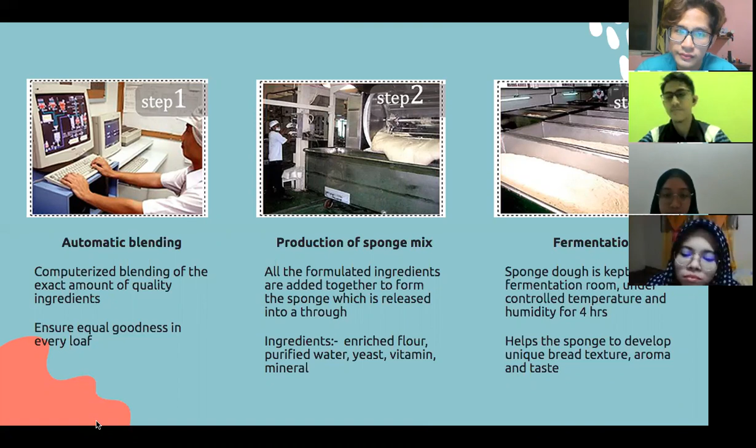The next step is the fermentation process. The sponge dough is kept in the fermentation room under controlled temperature and humidity for about 4 hours. This fermentation process helps the sponge develop its unique bread texture, aroma, and taste.

The next step is production of the dough mix, where the sponge is mixed again to form the dough. Then comes the dividing process, where the dough is divided into the required weight for each loaf of bread.

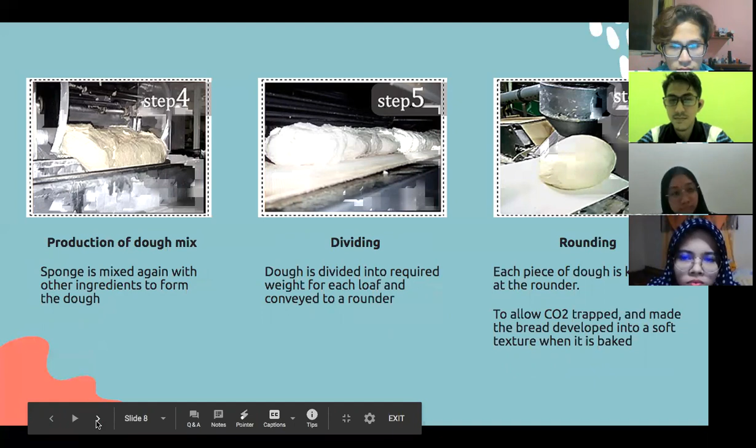The next step is rounding, where each piece of dough is kneaded at the rounder. This rounding process makes sure carbon dioxide is trapped into the bread, which allows it to develop a soft texture when baked later.

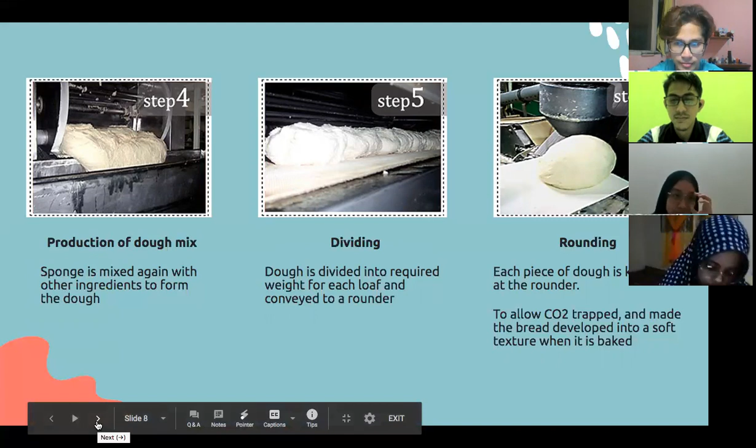The next step is check weighing. Through the check weigher, the dough pieces that are over or under the required weight are automatically rejected.

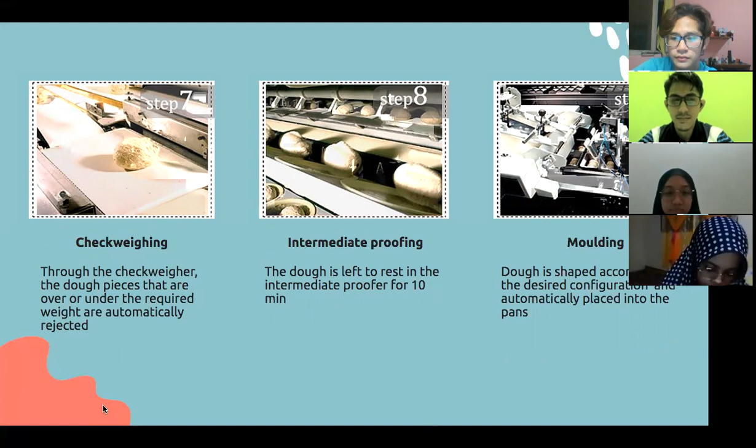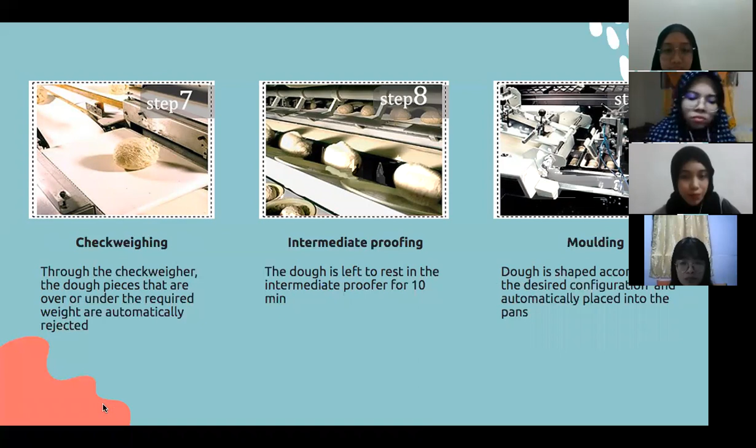The next process is intermediate proofing, where the dough is left to rest in the intermediate proofer for about 10 minutes. Next is the molding process, where the dough is shaped according to the desired configuration.

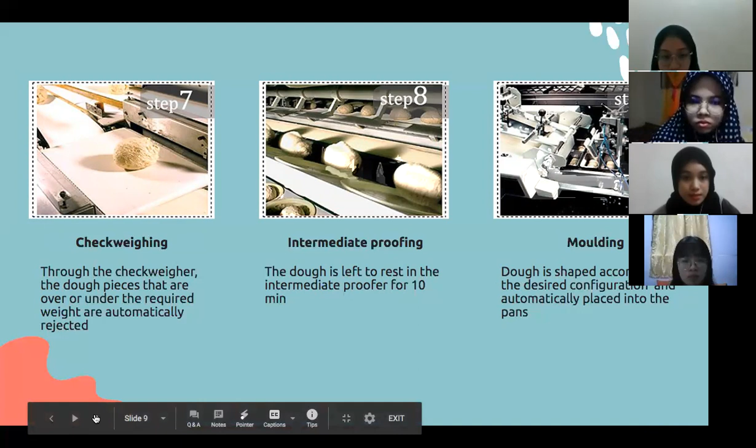The next process is automatic lidding, where the pans containing the loaf of bread are lidded automatically to give the bread its uniform rectangular shape. Next is the final proofing process, where the yeast allows the bread to rise further to the desired height.

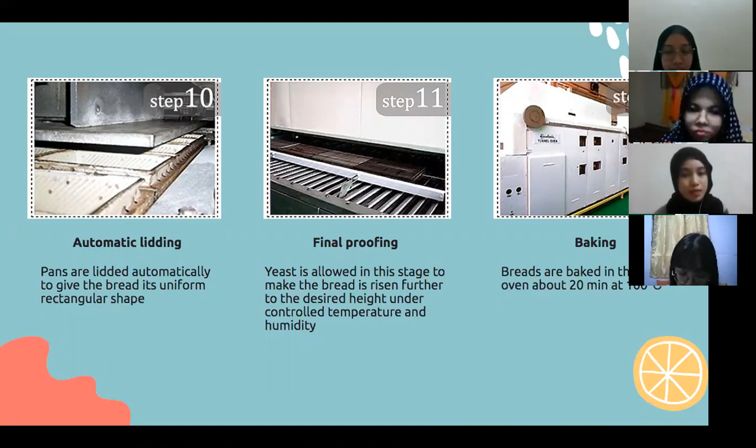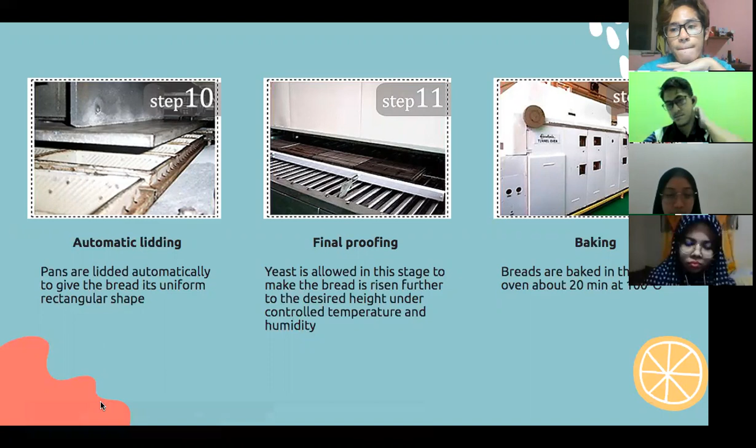Next is the baking of the bread. The bread is baked in the tunnel oven for about 20 minutes at 180 degrees Celsius.

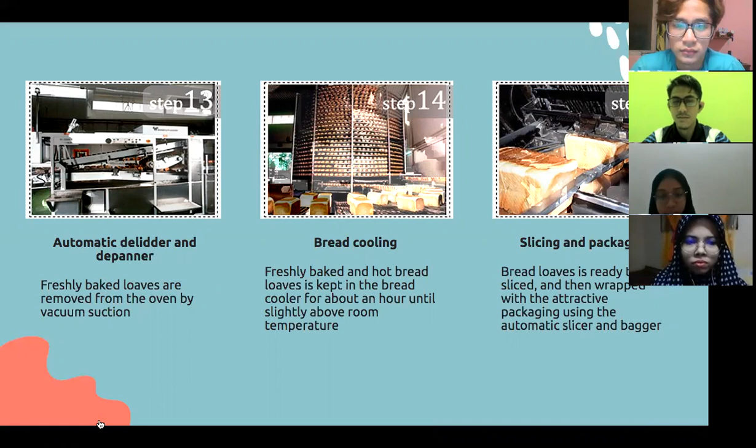The next process: the freshly baked bread is removed from the oven by vacuum suction using the automatic depanner. Then comes bread cooling, where the fresh baked hot bread loaf is kept in the bread cooler for about an hour until it's slightly above room temperature.

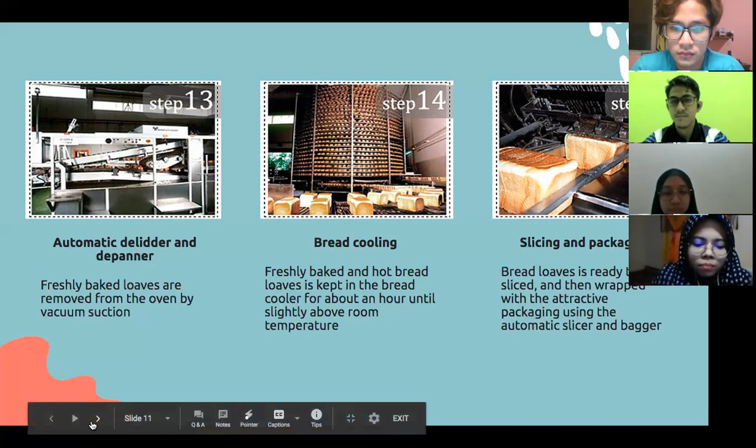Lastly, the process of slicing and packaging. The bread loaf is ready to be sliced and then put into attractive packaging using the automatic slicer and bagger. That's all the process for the production of white bread.

I will continue with the types of waste produced by the bread industry, especially white bread products. The first waste produced is raw ingredients. Usually, raw ingredients are thrown out because of spoilage, such as flour, sugar, and yeast.

Next is dough, which usually gets stuck in the bread machines, such as the blending, mixing, and rounding machines. Next is bread crust, which is usually found at the oven due to the baking process.

Next is rejected bread, which is found at the quality control process due to burnt bread.

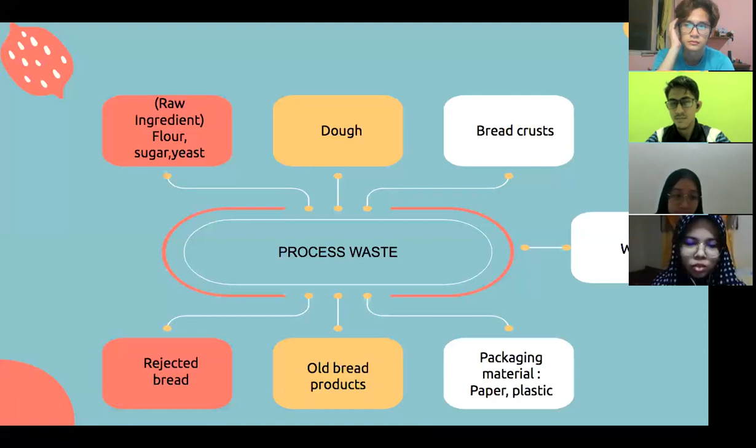Next, I will explain the waste management techniques suitable for each waste byproduct. For all the solid waste just explained, we decided to dispose of it using a sanitary landfill. It is a designed structure built into or on top of the ground in which trash is isolated from the surrounding environment.

The reason we chose sanitary landfill is because all the solid waste in making white bread is non-hazardous. Therefore, it is suitable to use landfill as it will not cause damage to the land. Besides, sanitary landfill will not cause air pollution as it is designed, sited, operated, regulated, and monitored in a safe and environmentally responsible manner. Moreover, using sanitary landfill gives an economic benefit for the industry as it is low in cost.

This is the overview for the wastewater treatment in white bread making process. It consists of preliminary, primary, secondary and tertiary treatment. First of all, I will explain the preliminary treatment part.

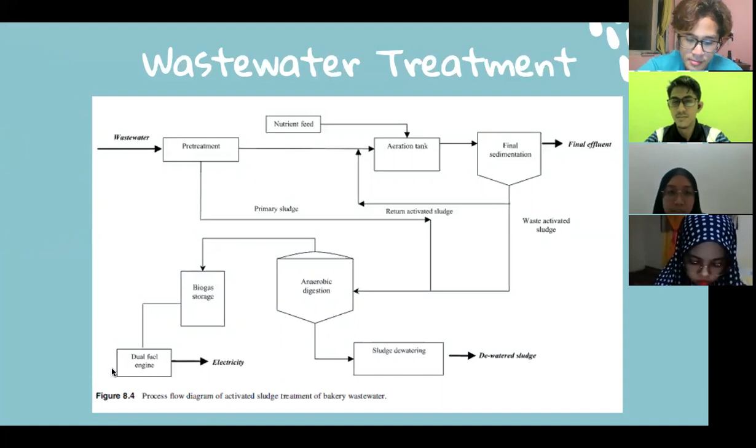The first step is screening, which is basically to remove the coarse particles in the influent. The second step is separating the fat, oil and grease. As the wastewater in bread making process normally contains a high amount of these organic compounds, this step generally reduces the difficulty in the subsequent biological treatment.

The third step is flow equalization and neutralization, which is to meet the peak discharge demand. A decrease in pH and bad odor are common problems during operation. The fourth step is acidification, which helps break down any remaining fat, oil and grease by adding sulfuric acid to keep the pH at an optimal level.

The fifth step is coagulation and flocculation. Coagulation is used to destabilize the suspended solids, while flocculation is used to grow the destabilized suspended solids so that they become heavier and large enough to settle down. This is done by adding chemicals like alum and ferric chloride.

The next step is sedimentation. The working mechanism is based on the density difference between suspended solids and water, allowing suspended solids with larger particle size to settle more easily.

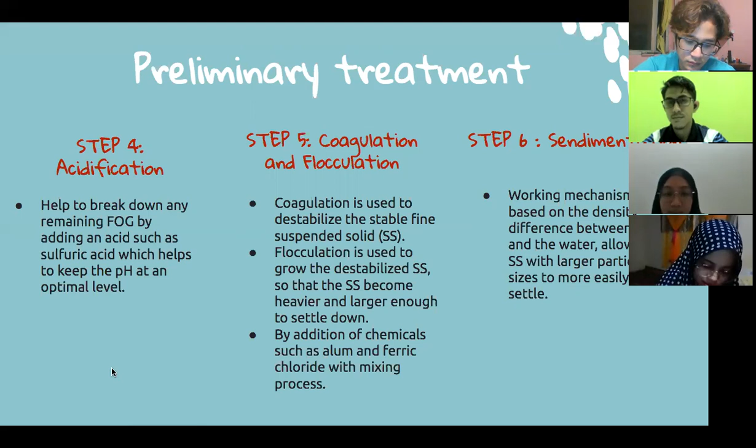The next step, which is the last step for preliminary treatment, is dissolved air flotation. This works by pumping compressed air bubbles, and because of the sudden reduction in pressure, air bubbles form and rise to the surface of the tank. The suspended solids, fat, oil and grease adhere to the fine air bubbles and are carried upward.

Generally, preliminary treatment removes suspended solids, fat, oil and grease, controls pH, and preconditions the wastewater to a level optimum for primary or biological treatment.

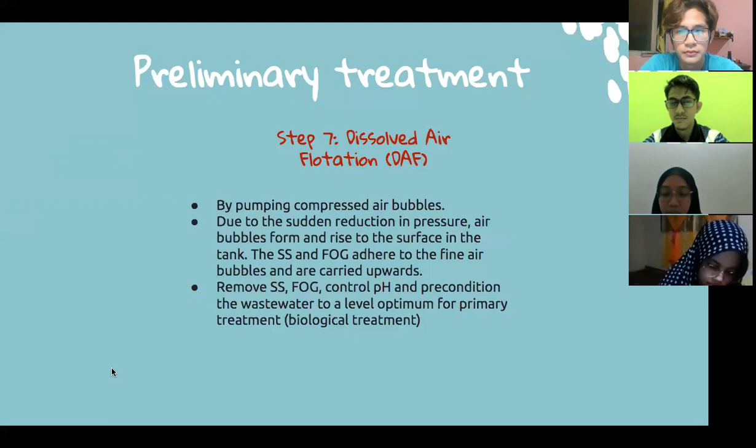Next, I will explain the primary and secondary treatment of wastewater. First, the primary treatment includes fat and grease removal and sedimentation, to remove suspended solids and organic matter. It also involves the sedimentation tank, known as the primary clarifier. When the water flows through the system, the sludge sinks to the bottom, and this sludge is then collected in a hopper and pumped out for removal.

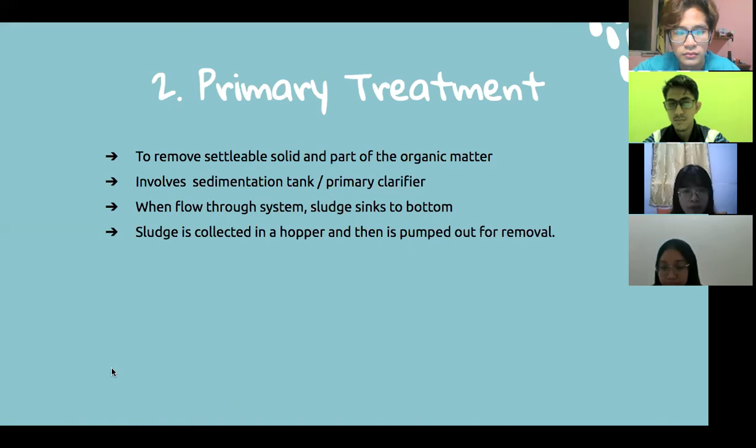For the secondary treatment, there are two options: the activated sludge process and the trickling filter. First, I will explain the activated sludge process. It consists of an aeration tank, final sedimentation, and excess sludge treatment.

The process is as follows: first, the effluent from primary treatment is pumped and mixed with a bacteria-rich slurry. Then oxygen is pumped through the mixture. It then goes to the secondary settling tank, where water is siphoned off the top of the tank and sludge is removed from the bottom.

Then some of the sludge is used as an inoculum for primary effluent, and the remaining sludge, known as secondary sludge, is removed and added to the primary sludge. They are subsequently anaerobically digested to produce fertilizer.

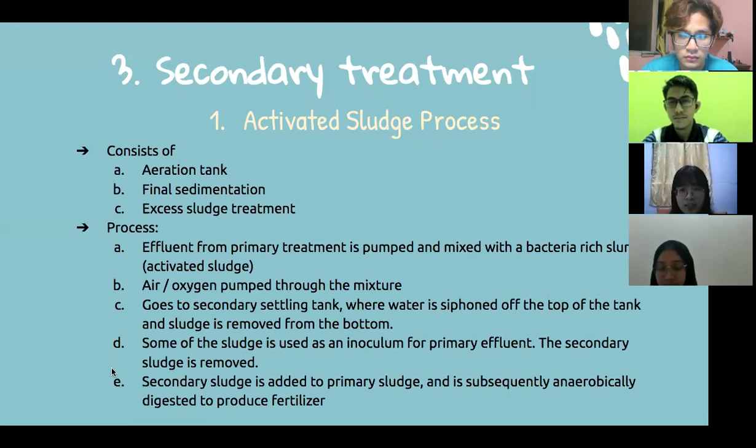For the trickling filter, it consists of a fixed bed of rocks, coke, gravel, or plastic media, forming a layer for microbial slime to grow.

The process of the trickling filter is that microorganisms attach to the solid media and form a layer of biofilm. Then the organic pollutants are adsorbed onto the biofilm surface. Oxidation reactions occur and produce end products such as water, carbon dioxide, and nitrate.

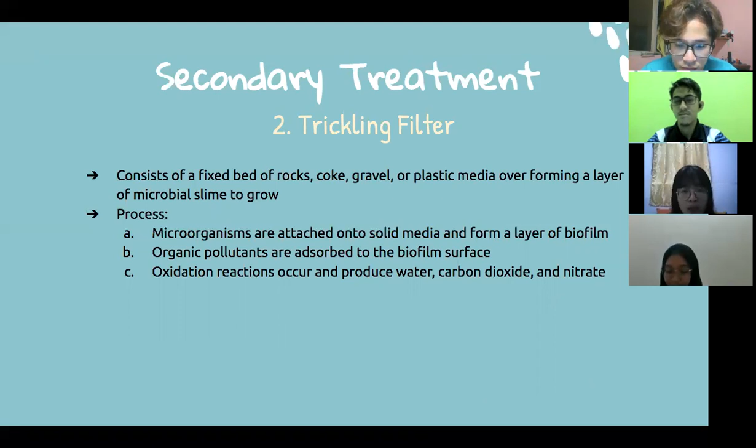I will also explain the comparison of the activated sludge process and the trickling filter. The advantage of the activated sludge process is that it needs low installation cost, while for the trickling filter, the energy released from the oxidation of organics can be used for the maintenance of microorganisms.

The disadvantages of the activated sludge process are that it needs a large area for installation, and sometimes the supernatant has higher turbidity which can affect the end effluent water quality. For the trickling filter, excess growth of microorganisms can cause serious blockage in the medium and reduce the porosity.

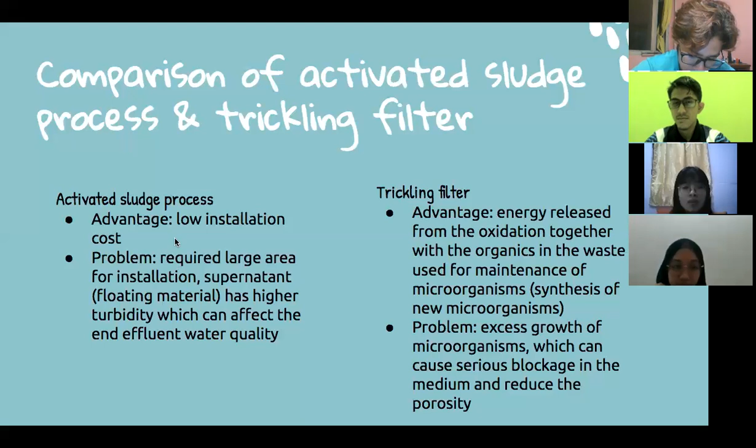Since both processes have their own advantages and disadvantages, the bread industry can choose the suitable process that suits the condition of the wastewater treatment. Next, I will pass to the next person to talk about the following treatment.

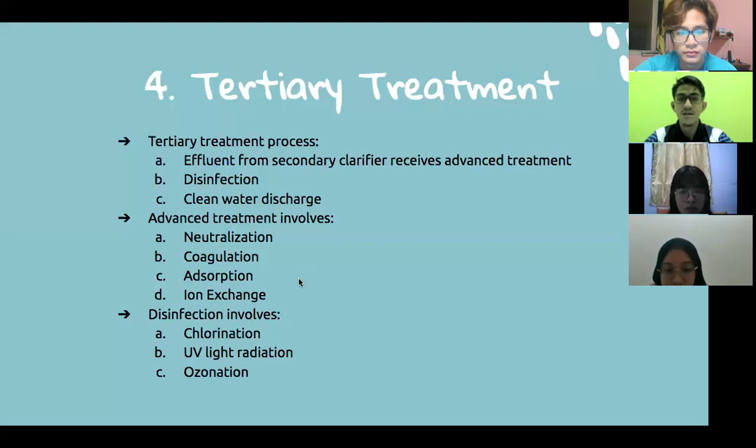Next, I will talk about the sludge treatment. This is mainly anaerobic digestion, which produces biogas with high methane content that can be used in generators to generate electricity. Sludge is moved into thickening tanks that allow it to settle down and separate from the water. The remaining water is then collected and taken back to the aeration tanks for treatment.

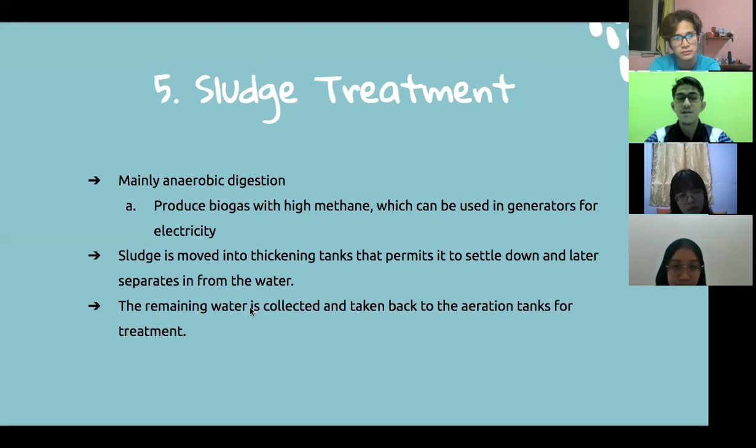So the conclusion for this presentation is that solid waste sanitary landfill is suitable for the bread industry because the waste from bread is non-hazardous solid waste, and it will not cause air pollution. It is also operated and regulated in a safe and environmentally responsible manner.